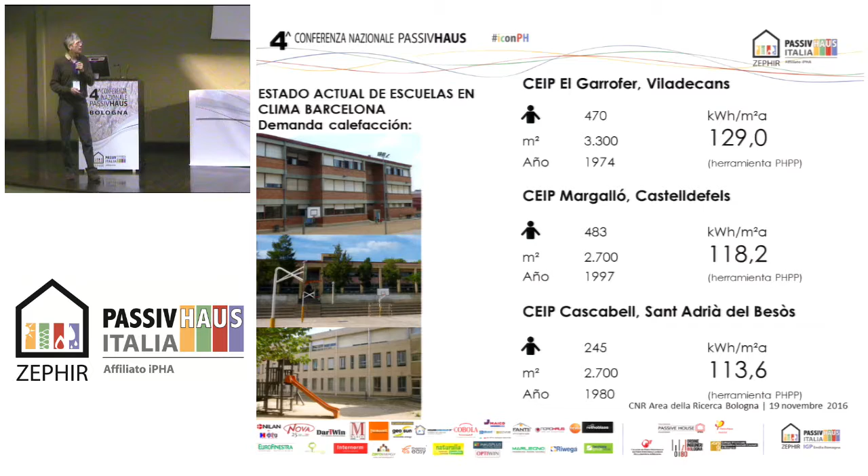We were charged by the Area Metropolitana de Barcelona to carry out these audits, and we had the luck that there was one person in the municipality of Viladecans, near Barcelona, who was very interested and knew the passive house standard. She convinced the mayor to pursue a retrofit project, a real project - because first we started with an audit, and then we had the occasion to carry on a project for the retrofitting of this existing school.

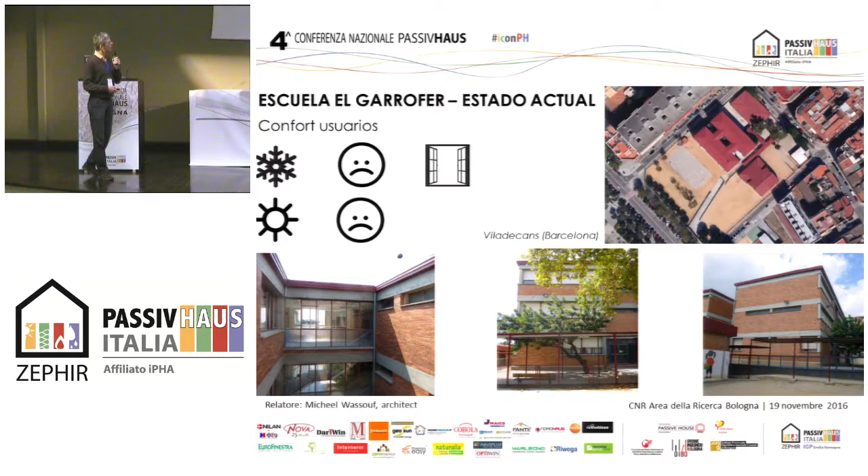An interesting issue with this kind of project is the very limited budget of the retrofit. In this case, we're dealing with about 250 to 260 euros per square meter for the retrofit works. So it's really a very, very low budget, and I think this may be interesting for you, and also for other municipalities in Spain - this challenge of carrying out an energy retrofit with a very limited budget.

So I can show you here some images of the school, with a simple sliding frame and a simple glass, which almost connects the classrooms with the exterior of this municipality.

We also carried out some CO2 measurements with a very simple meter - not a professional one, but it was enough to convince the mayor of the problems regarding the air quality of the classrooms. You can see we reached almost 4,000 ppm of CO2 concentration.

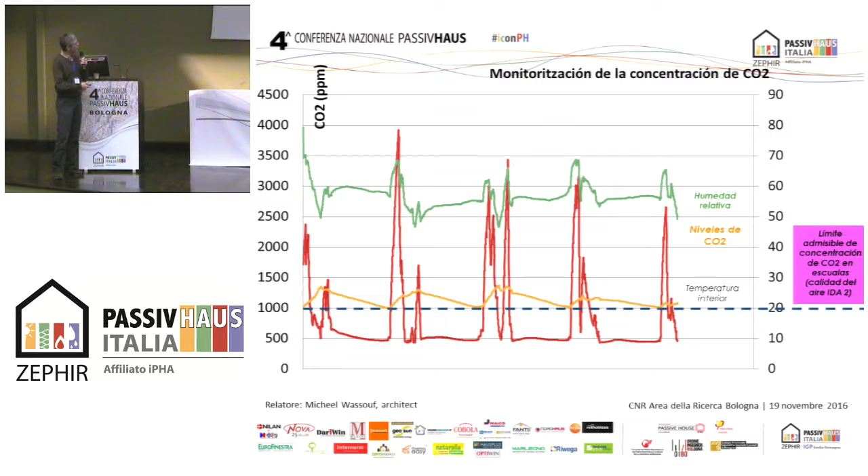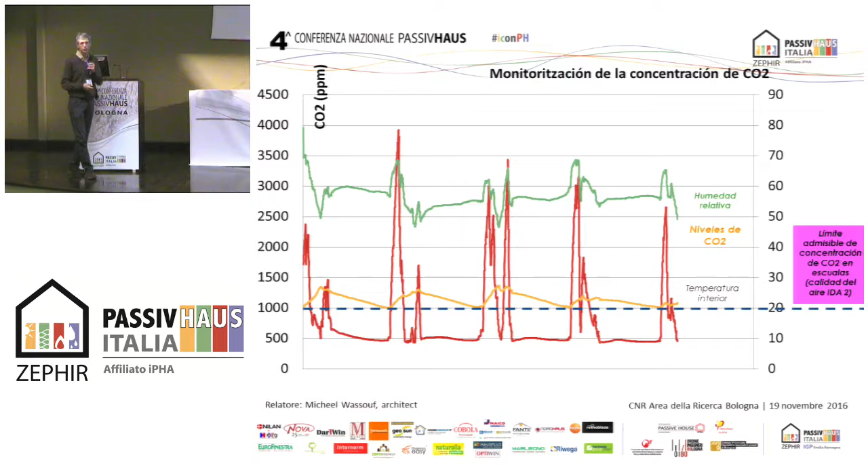Here you have the official Spanish national limit of 1,000 ppm CO2, despite having very low air tightness. Curiously, we got these high values because normally if a building has high infiltration, the tendency is that CO2 values are not so high - but in this case we observed this phenomenon. We also carried out a blower door test.

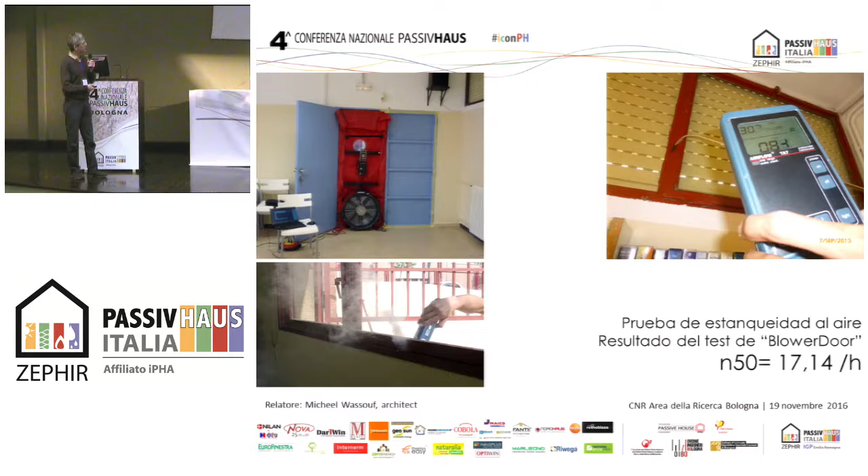Actually the frames, as I already said, were not existing in some parts of the school, so we had some problems to pressurize the building to 50 pascals, but at the end we got 17 n50 air change rate of the building.

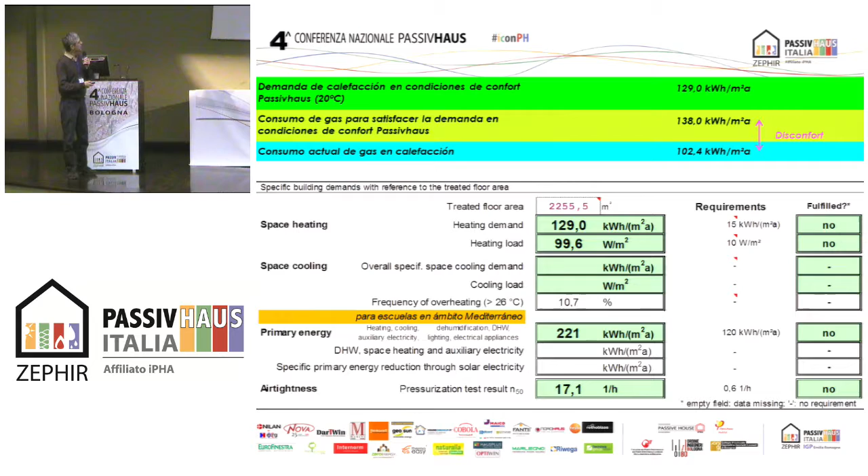Here we have the actual consumption of the school, the real consumption, and this was with the PHPP, the calculated consumption, so the gap between these two values is supposed to be the lack of comfort of this school. So you can see here also, curiously, in this hotter climate of Barcelona, of course without air conditioning, a very big part of the energy consumption is the heating demand.

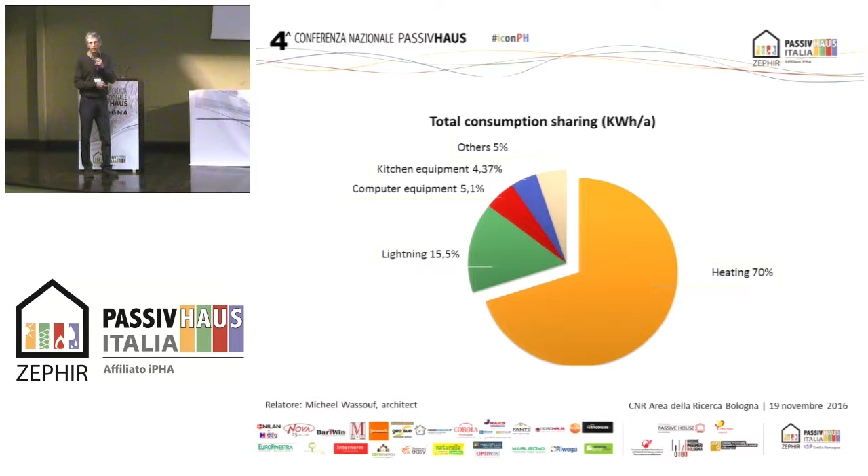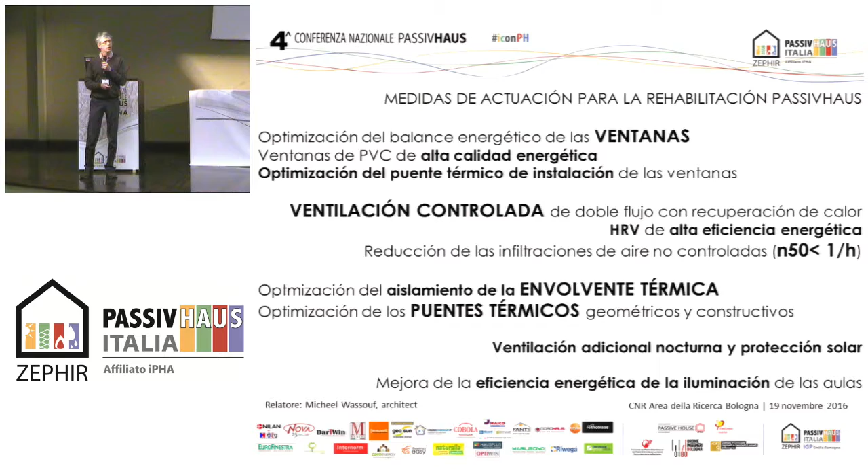So we started with different proposals to reach the Passivhaus, or let's say the EnerPHit standard. These are technical proposals which are not very special. You may know them all. Standard solutions like changing the windows and putting an external insulation and working the air tightness, these things you may already know. We had here this proposal of changing to PVC windows.

First of all the architects of the municipality were not so happy with the PVC, because in Catalonia they like more the aluminium frames. We have these prejudices that PVC frames are not so environmentally performant like the aluminium windows, but at the end we convinced them to work with these PVC windows, which are cheaper than the aluminium frames if you work with these very low U values

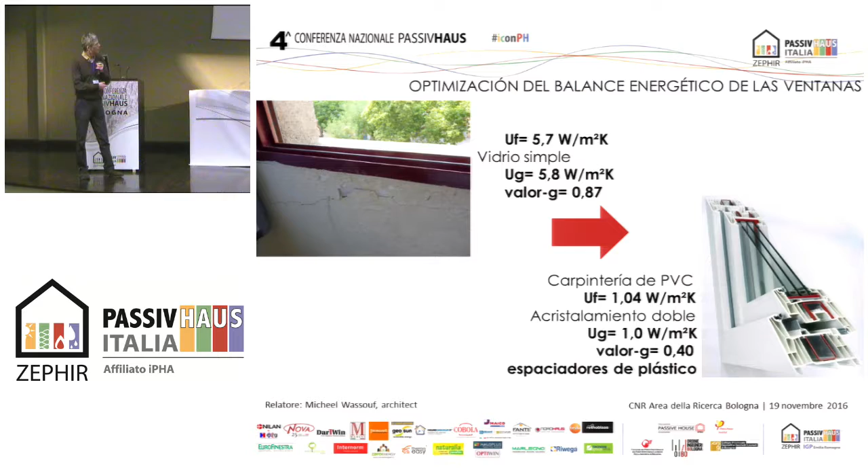of 1.04 more or less. And in Barcelona, of course, we don't have to use triple windows, so you see here the photos were triple, but at the end, of course, the window is a double window with 1.0 watt per square meter Kelvin U value.

So one of the challenges of this project was, as I already said, the limited budget of the municipality, as they had only like 30% of the overall budget of the works to get the EnerPHit standard. So we had to cut the project in 3 phases. So at the end, it's going to be a step-by-step retrofit project.

We have the challenge of starting with the first retrofit in summer of next year, in June. As you know, in public schools we can only carry on the works between 20th of June till 10th of September, so we have 2 months to really do the work, so it's not so easy to organize all the logistics, also dealing with the public procurement and public promoters, so it's not as fast as if it had been a private school, which is much faster in all these processes.

So this was one challenge, and the other one, due to having to work in 3 steps, we are going to have the first phase with changing the windows and also installing a new ventilation system, as now the actual school doesn't have any ventilation system, but the first step is installing new windows and working the air tightness, so we have to install a mechanical ventilation system.

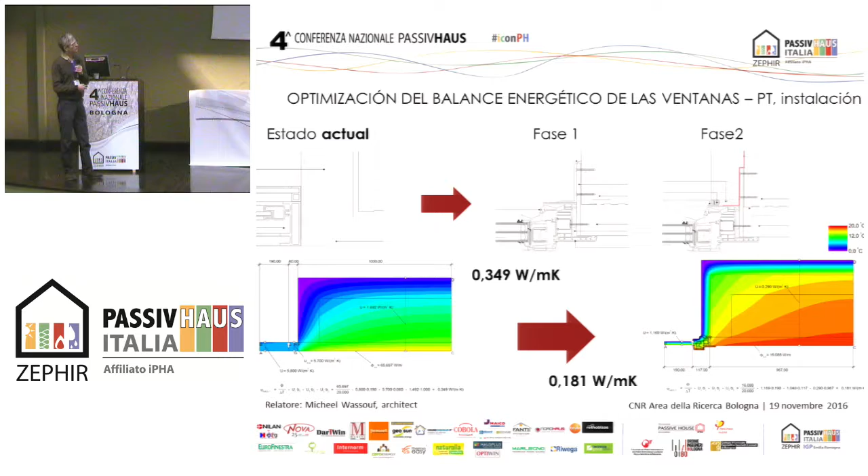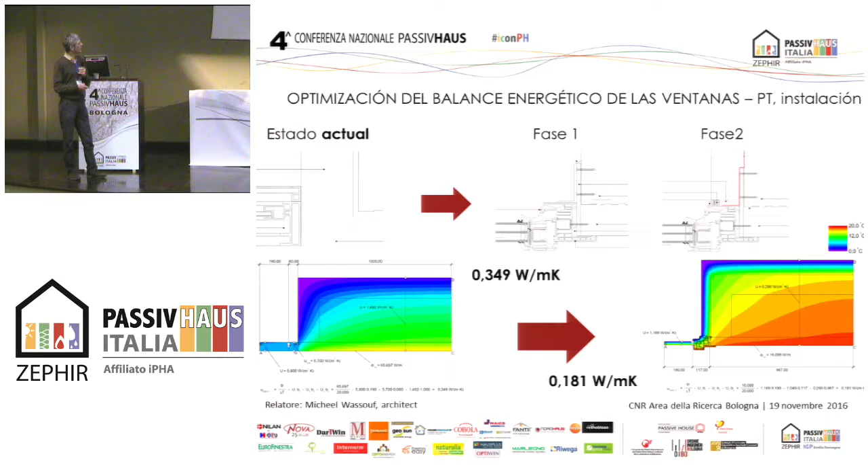And between the first and the second step, we are going to have a situation with some problems of the thermal envelope where the external insulation is not yet installed, so we have to protect the frames for 1 year from rain and from the outside weather with special frames. So this ends with a budget which is higher than the normal budget if we would have done everything in one step.

So here you can see, due to the limited budget, we can't change the position of the windows either, so we have the windows aligned with the interior wall, the same installation situation as currently. This is due to limitation of the budget, but as you see, everything is possible, even the Psi value: this is the actual Psi value, and here you can see the retrofitted Psi value after the first step.

It's lower than the first one, but it's still very high for a passive house. But fortunately, with a climate like Barcelona, these kinds of Psi values are still allowed. The only thing you have to control is that you don't have any condensation on this interior surface, and that is the kind of work we have done with the thermal

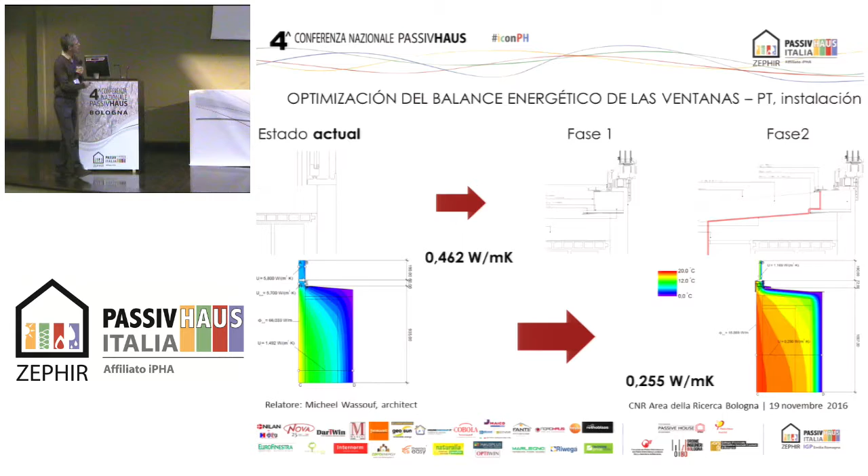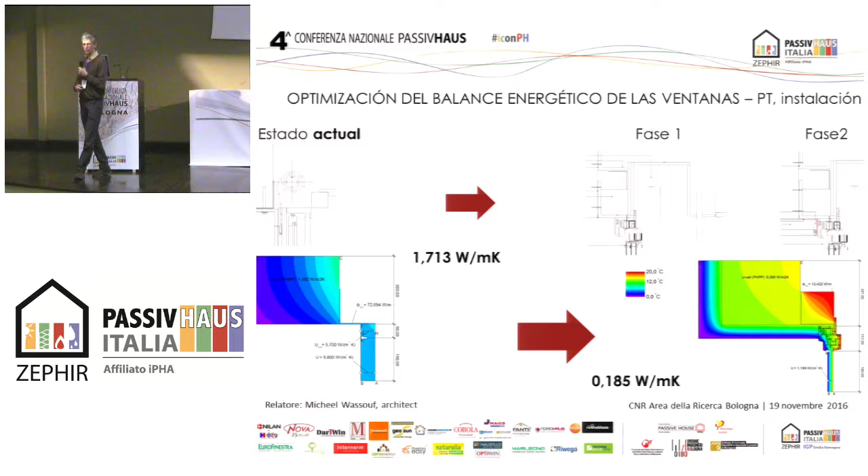calculation. Here you have the detail of the upper part of the windows, so this is the actual situation, and then you still have these very high U values due to the installation situation of the window. But actually for Barcelona it is also of interest to have the windows on the inside of the walls, so we also have higher solar protection of the building. So as you see, it's not necessarily the North European solutions that are of interest here, but more adapted solutions for Mediterranean passive house.

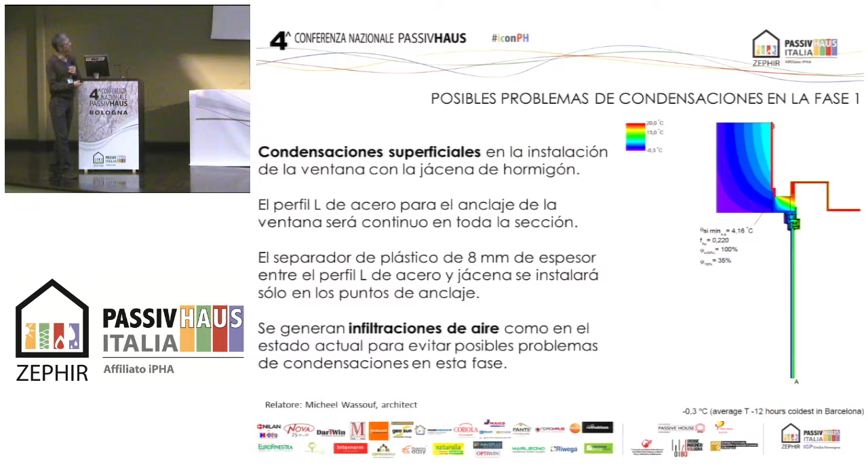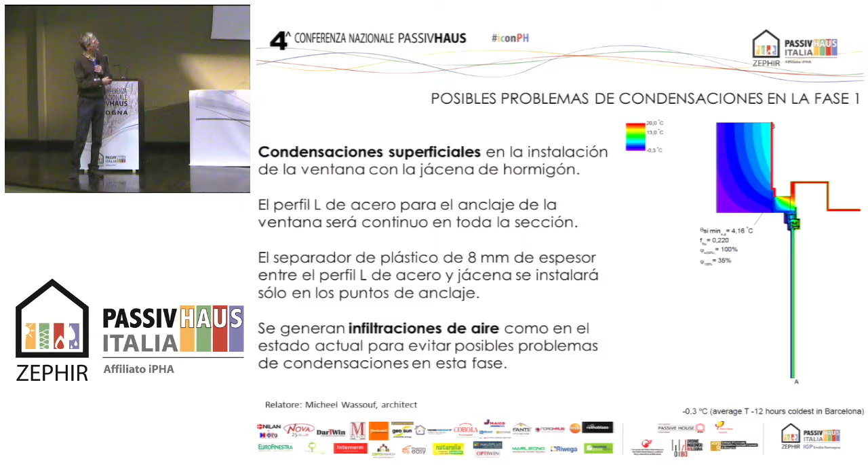This is the calculation of the first step, which is supposed to be installed this summer. In the first step we don't have any insulation, so we are going to have surface condensation on the inner side. This is the inner side of the building, so we're going to have a situation which is not very optimal for a building, but as the actual situation already has these condensation problems, we just have to control this and make some controlled openings to get the vapor outside of the building in this case.

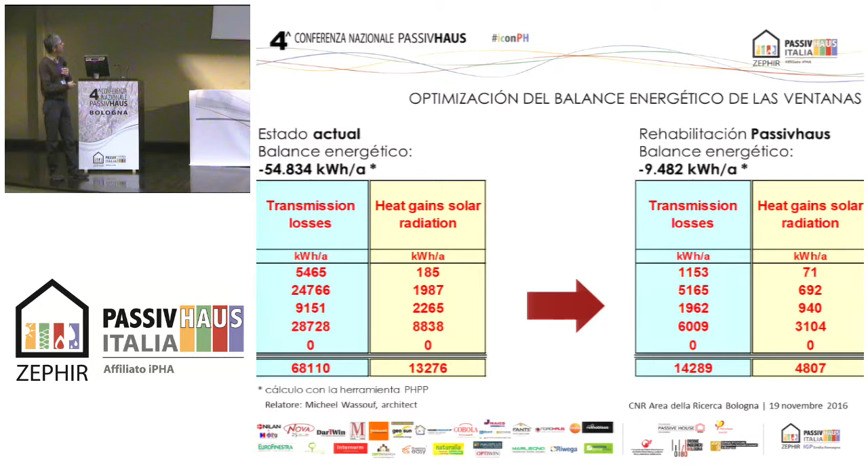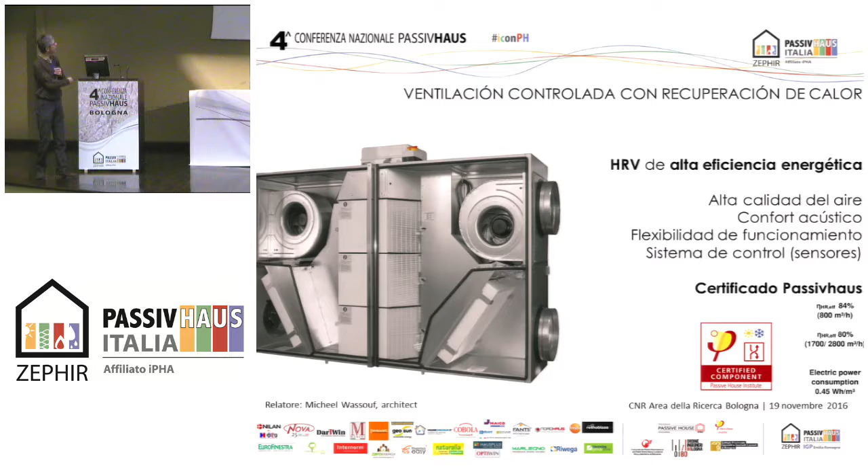This is the calculation of the energy balance of the window before and after the first steps. Then here another challenge is the installation of the mechanical ventilation system. Very often in these retrofit processes you have no space for installing these gadgets. These buildings don't have a cellar, and neither is the roof accessible, so you can't install the ventilation systems in the roof or in the cellar, and there is no space in the schools.

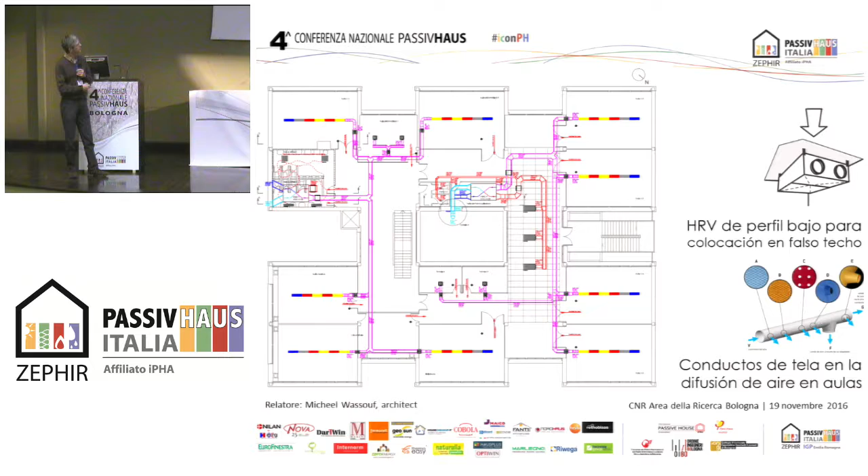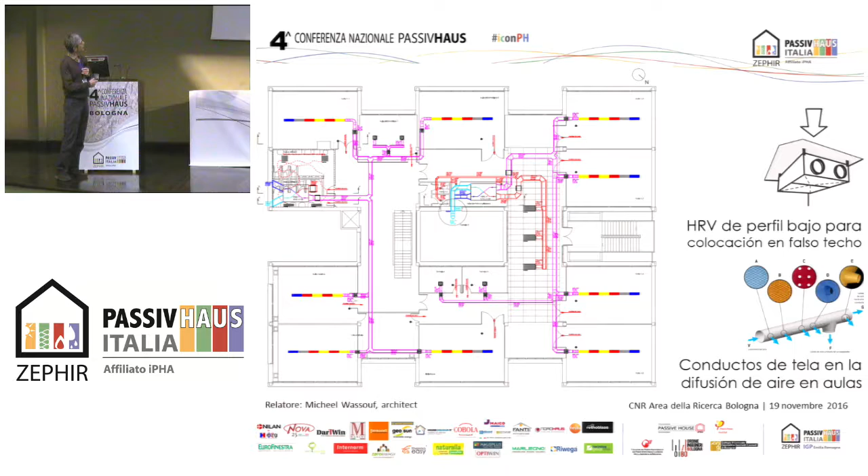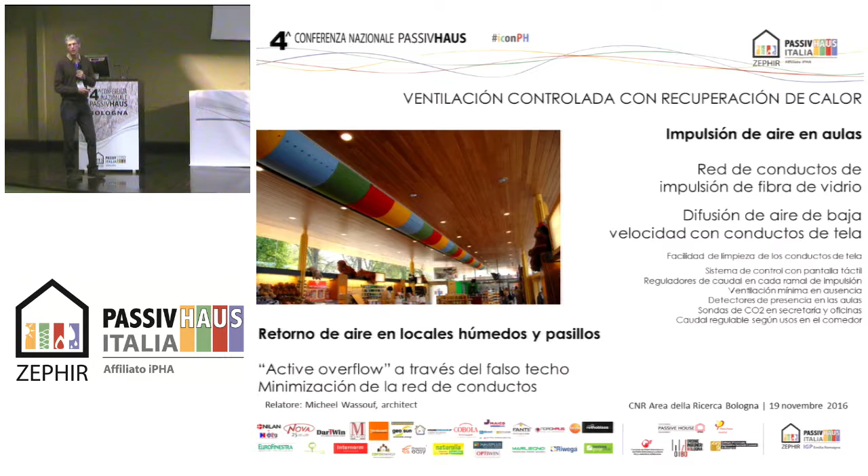So you have to look for spaces like the suspended ceiling here in the bathroom or in some storage rooms to carry these big machines, as you probably have the same problem, with very high volumes. You have to justify for the legislation, so you have very big ducts to comply with the Spanish legislation, and this looks easy, but it's really like a puzzle. You also have to have the luck to get all the ducts outside of the building. We also combined textile ducts in the classrooms to have some colors and some more architectural issues in the building. Here you have some details.

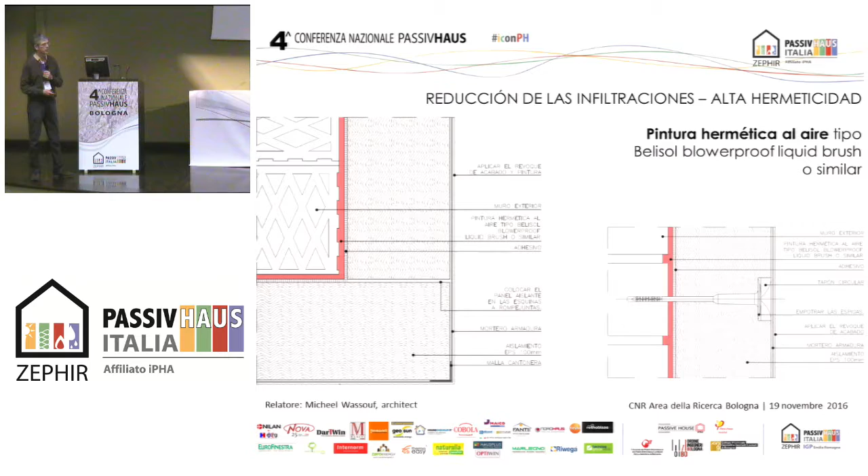Airtightness is a second challenge of this building, as we can't do works inside of the building. We can't do anything on the inner side of the walls, so we have to work on the outside. As you may see, this is the existing wall, and this is the capote, the external insulation system. So we are going to try this airtight painting, which is now also coming onto the Spanish market. It seems to have quite good results in the first buildings in Spain.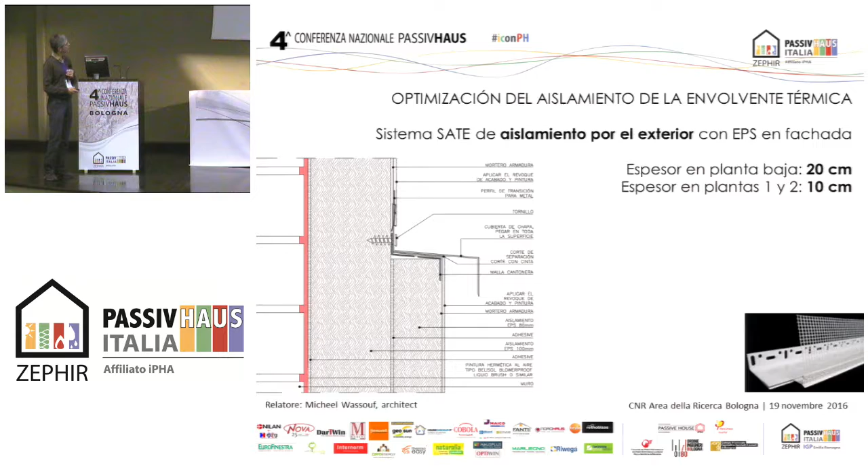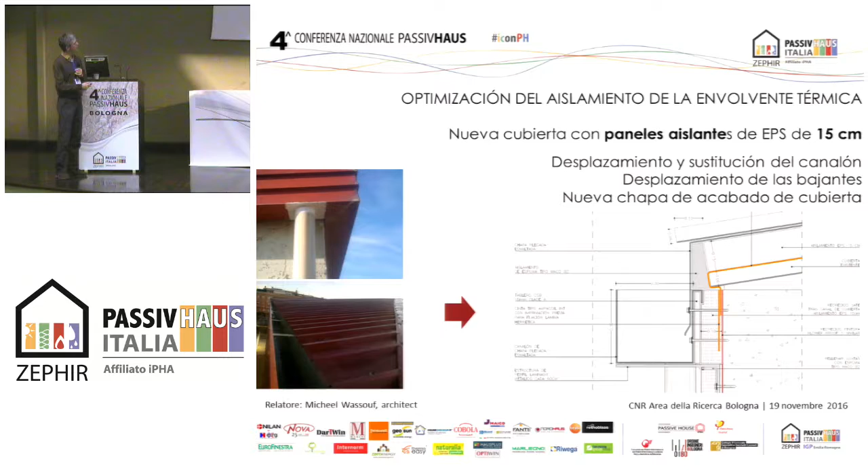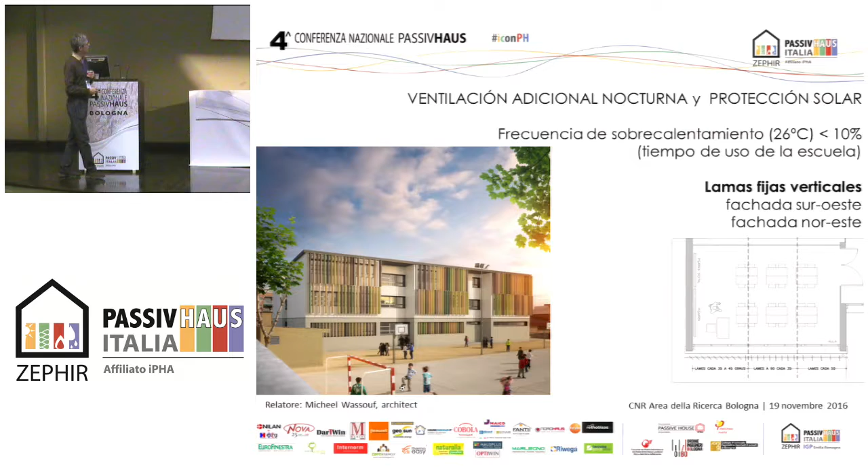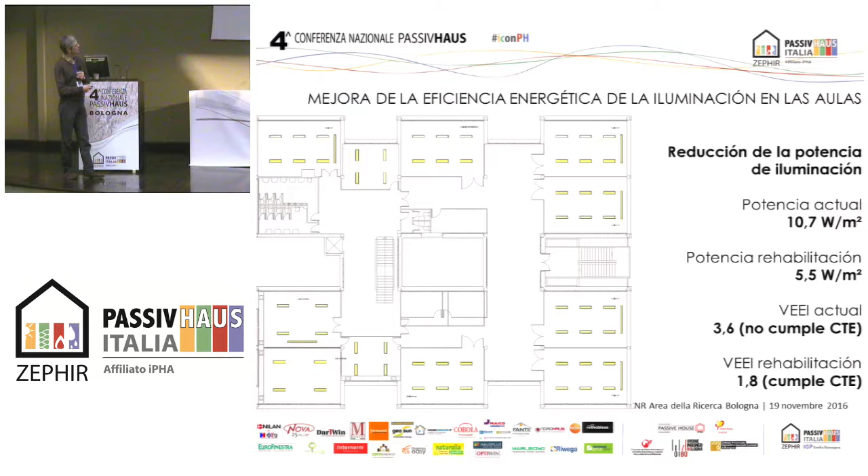And well, these are the details with the thermal bridge calculation, also insulating the existing roof without removing the existing roof. We are going to put new insulation and a steel structure on the existing roof. First of all we wanted to work with mobile vertical blinds, but due to economic limitations we can't carry out this idea. So in the end it's going to be a fixed element for economic reasons, combined with textile elements inside and sometimes also outside, and changing the illumination to a more energy efficient solution. So this is the simulation with designPH.

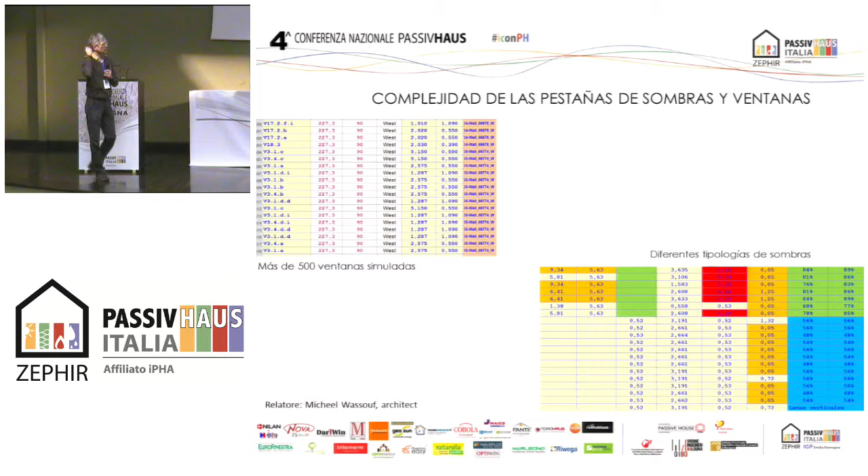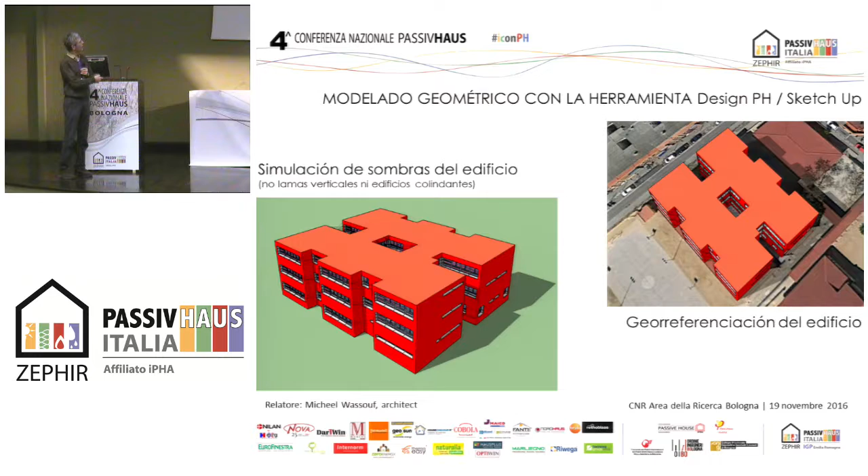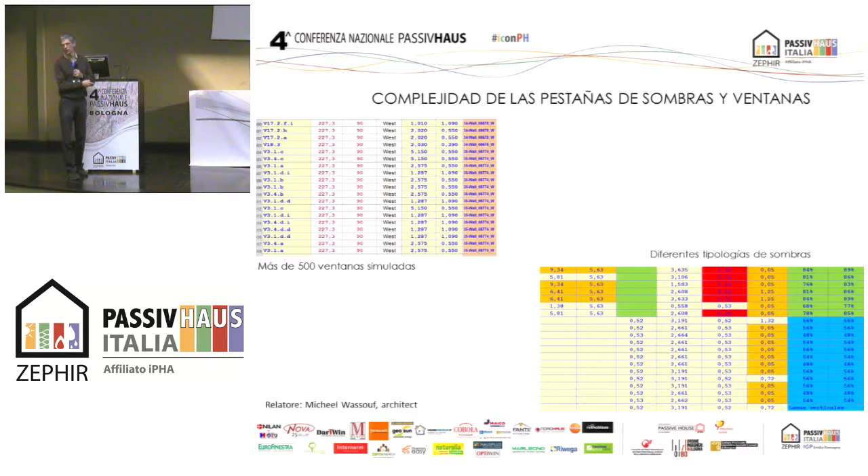We did this with designPH because it was faster than doing it manually by the PHPP. It seems it is a simple building with, as you see here, a repetitive structure of always the same windows, but as you may know, those who work with PHPP have to distinguish, even if it's the same window, between different shade situations. So at the end, we had like 518 different windows in this simulation.

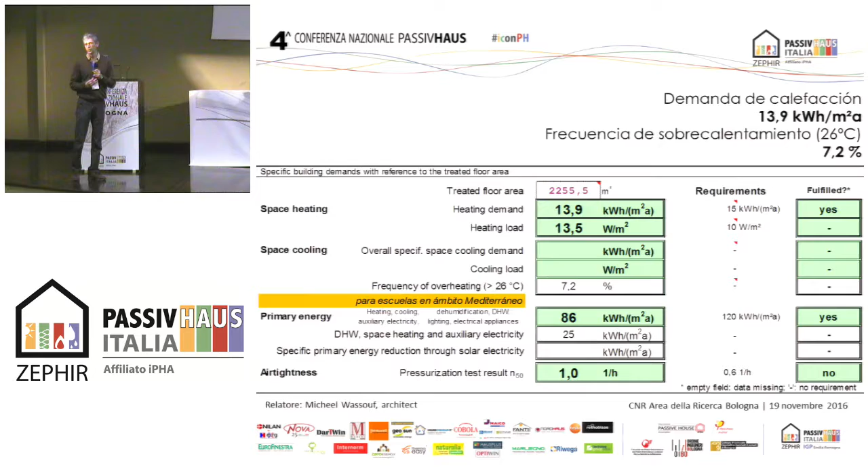And we are now in the process with the Passivhaus Institute of certifying this building. We are still negotiating with them whether they accept 26 or 25. Normally, as you may know, you have 25 degrees for summer comfort, and we would like to see if it is possible to get 26 degrees for the upper comfort temperature.

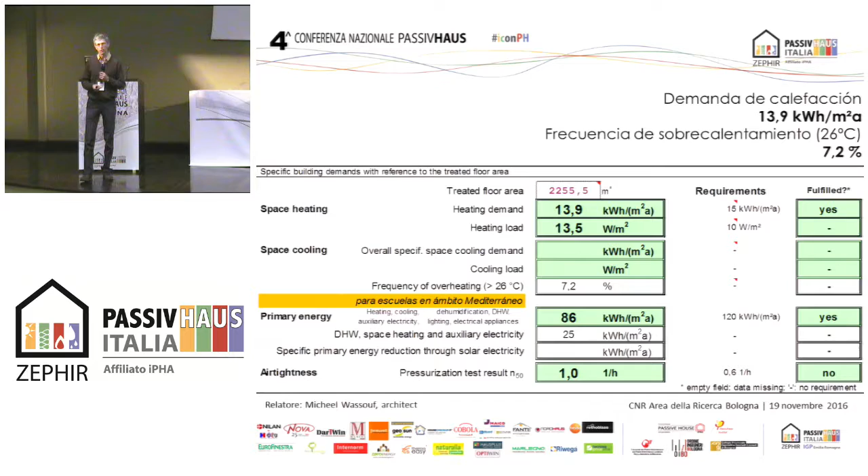And also we did some changes in the PHPP. We put away the summer months for the summer comfort. As in July and August the school is closed, we changed the algorithm of the calculation and put away these 2 months, because otherwise it would be impossible to reach the 10% maximum allowed value for Passivhaus certification.

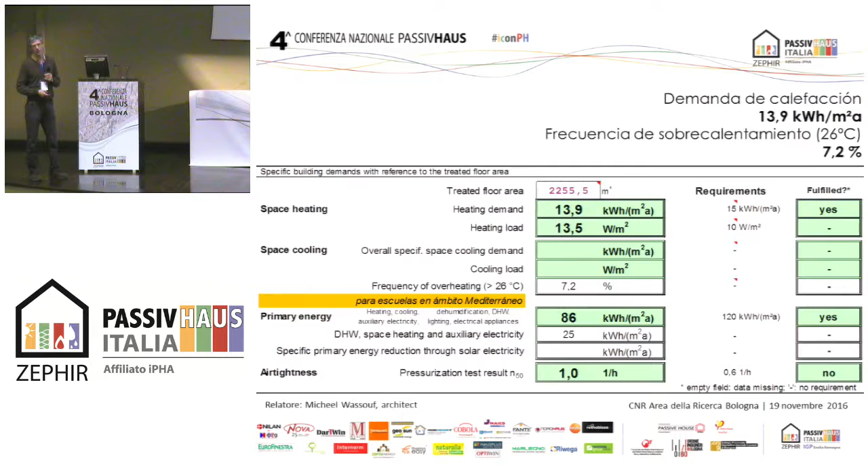We also have this political problem that the municipality can't install air conditioning in this school, because otherwise all the other schools in the municipality or in the region would also like to install air conditioning. So there is also a psychological and a social component in all this.

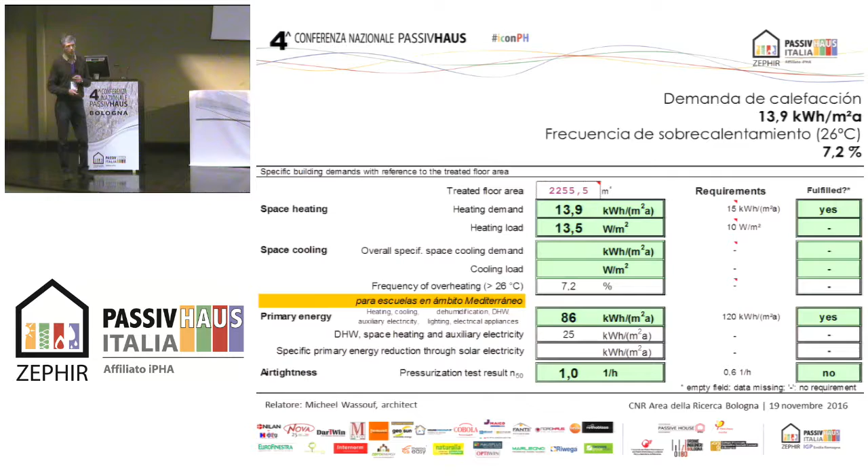But I think, getting to the end, maybe just 2 slides. The interesting message of this project is that it's almost possible to get an EnerPHit retrofit project, maybe not certified, but almost certified, with a very low budget. You don't have to have a normal budget like maybe private property, and you can, as you may see here,

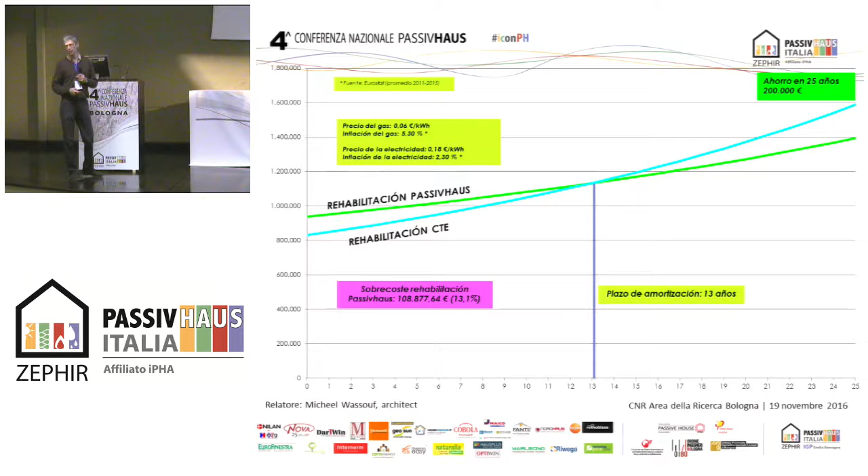we have compared the same retrofit with the Spanish legislation and with the Passivhaus solutions, and you see here the extra costs relative to the normal retrofit design. We have here this 13 years of payback time, and also similar to what Iliana was telling you with the PHPP, we carried out this comparison with the PHPP with the annuity.

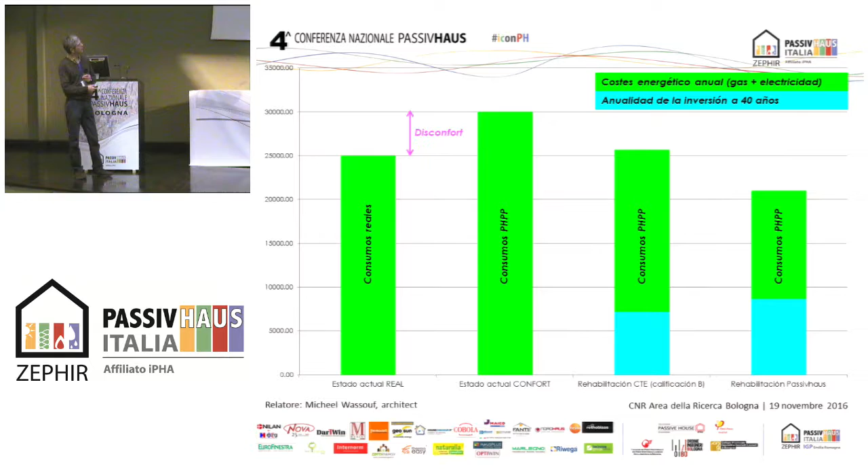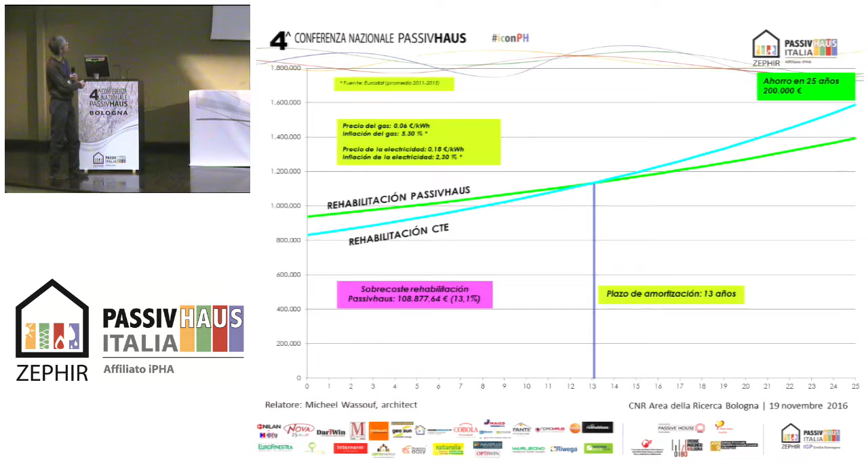So now we have this school with these costs based on 40 years, with the expenses for heating and electricity consumption getting higher and higher. I think there is one slide where you see 5% inflation of gas and 2.3 of electricity. So the real consumption, if you make the annuity calculation, is about 25,000 euros a year. And this is with the discomfort of the building.

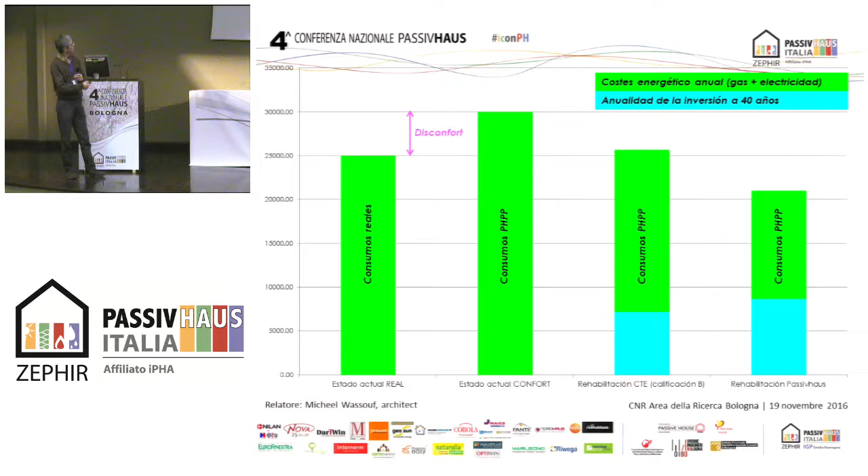And then if you make the normal retrofit of the building, you have these annuity costs for the retrofit itself, and then you have less energy consumption. So it's still a little bit higher than the actual costs. So this is the step where Passivhaus could be interesting: you have more expenses for the initial costs, you have this annuity over 40 years, but with the sum of the energy consumption at the end, you have lower costs than the actual situation.

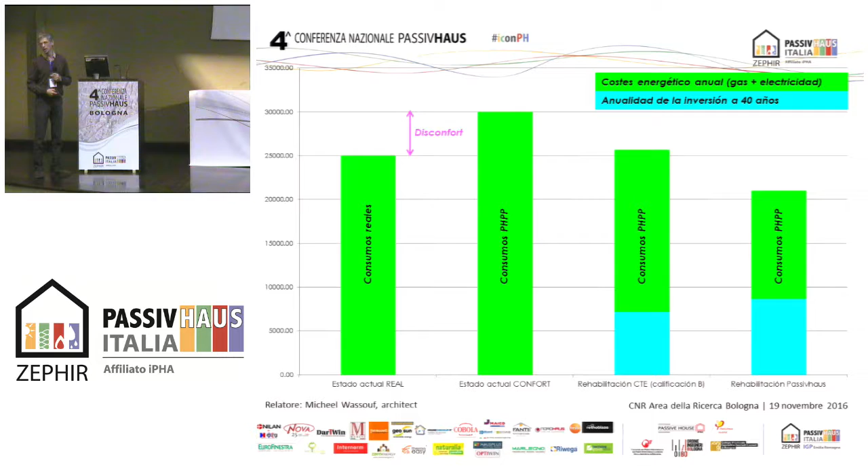So this is the last slide, just to motivate you if there are some politicians here in the audience to do something similar. You don't need to have like 1,000 euros a square meter. You can already, with smaller, limited budgets, turn this into a very comfortable building after the retrofit. Besides that, we are going to finish it in 2019 probably, so you need some patience, but as you know, our business is always very slow, so it's nothing special.

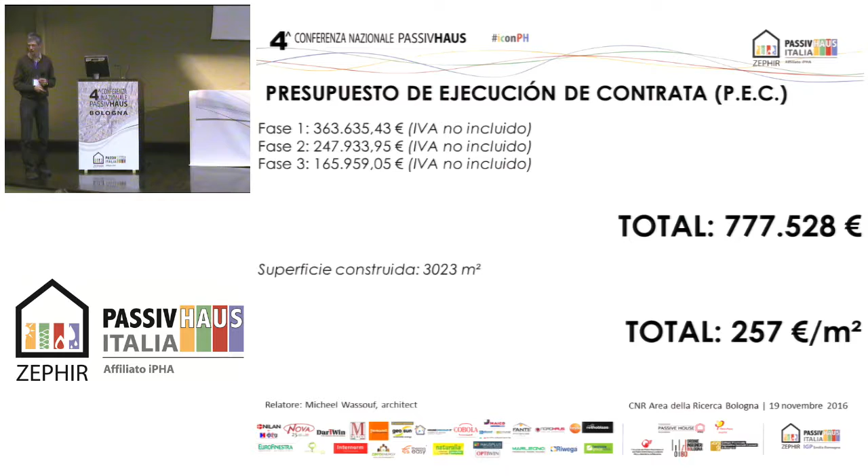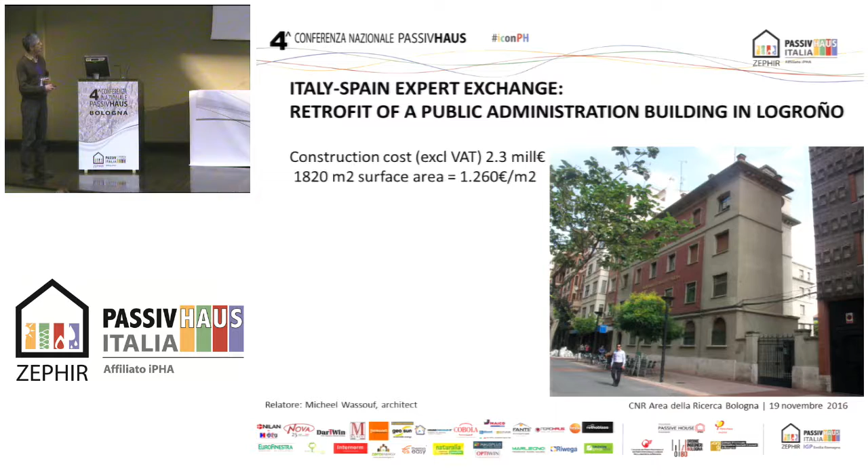So thank you. Francesco also told me to show you that we are collaborating with Italy on other projects. We are making a retrofit of a public building in Logroño, in northern Spain. This one really has a very good budget, with 1,260 euros a square meter. Here works are also starting, and with ZEPHIR we are certifying this building.